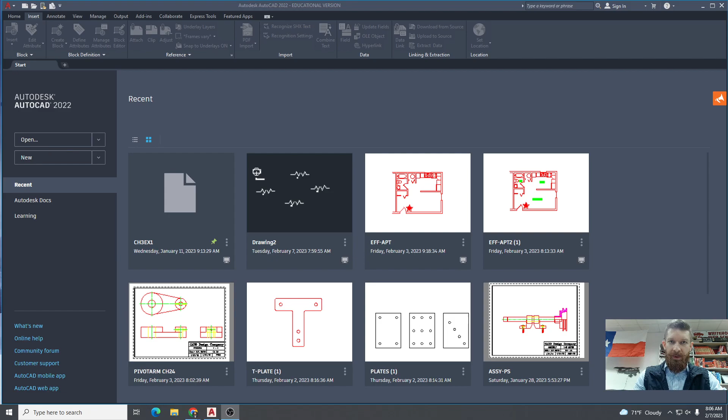So like a doorway or a window or a resistor symbol or something like that, you would use a block command. So you can essentially copy and paste it. You make it into one unit. So here we go. I'm just going to start a new AutoCAD template. I'm going to set my grid to 1 and my snap to 1. And let's just use that resistor example. That's a good one. So let me draw a little resistor here.

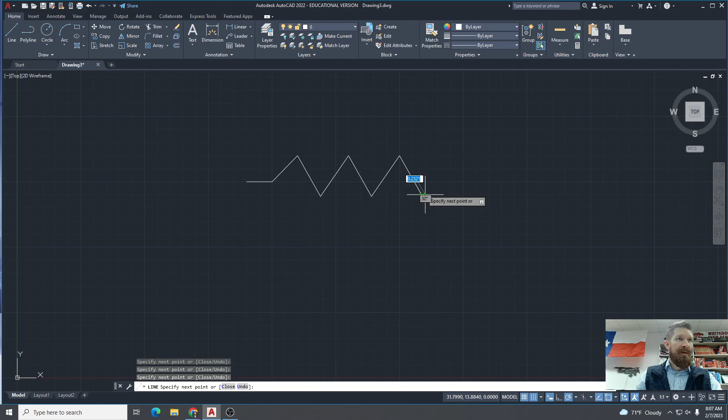For those of you that don't know what a resistor is, this controls the current in an electrical circuit by only allowing a certain amount of current to flow through. Right? It resists the flow of the current. We'll get into that more in engineering year number 2. Right? So here's my poorly drawn resistor.

If I'm going to make a block with an attribute in it, I don't want to make this a block yet. First, I want to create my attribute, and then I'm going to block it all together. So to go over those steps, number 1, create the objects that will comprise the block. So these lines, that represents the resistor. Use the ATTDEF command to create and place the desired text strings associated with the geometry, right?

Number 3, use the block command to convert it. So once we've got the attribute here, we're going to block it all together. And then use insert to insert it as needed. And then the attribute that we create will prompt us to put in a value. So let's use that attribute define command, ATTDEF. And we're going to create a new attribute.

What is an attribute? An attribute is just a line of text. It can be numbers or letters associated with a certain block. Here's my block right here. An attribute can be thought of as a label or a description for the block, but it's a little bit more than a text description. It's live. It gives you the chance to edit it each time you use the block.

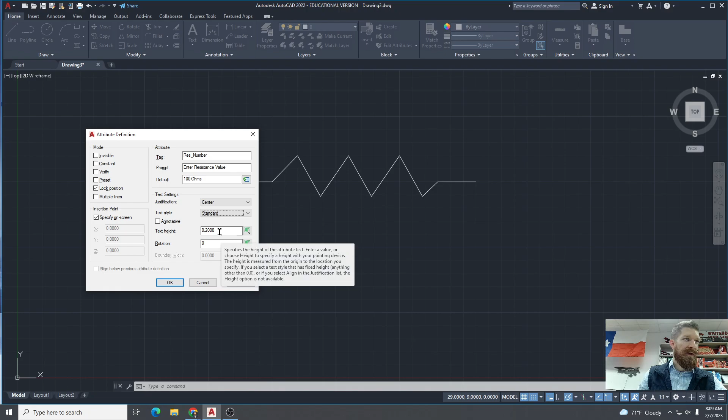So let's put a tag here. We'll say this is resistor number, and then the prompt is going to say enter resistance value. Okay, and then the default value, we'll just make it 100 ohms. Cool. Specify on screen, top left. We'll make justification center. You can do annotative text, so it'll resize when you print it, or you can do standard text. We'll make the text 0.2 inches tall with 0 degrees of rotation.

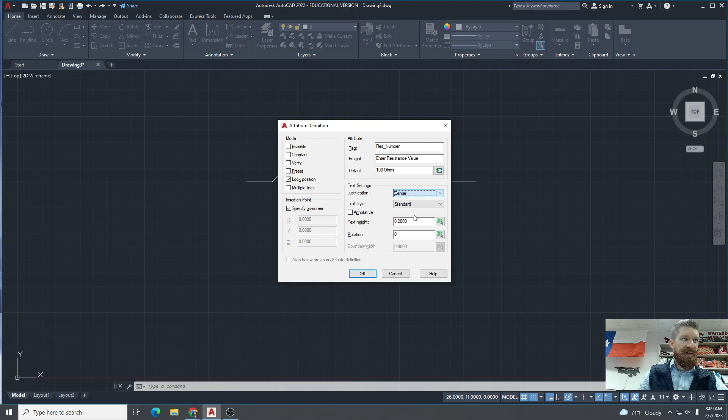And we'll hit OK. And we'll pop that right. Uh-oh. Let me try that one more time. Resistor number. Enter resistance value. We only want one line. Default value is 100 ohms. And justification is center, standard, 0.2 inches. Okay, let's try this one more time. We'll put it right here.

Very good. Okay, so we've got our geometry, which is this. And we've got our attribute, which is this. So what I'm going to do now is I'm going to block this all together. Block. And we'll call this resistor 1. Right? And notice you can change the base point, the object's behavior, the scale, all this kind of stuff you can modify here. I'm going to hit OK.

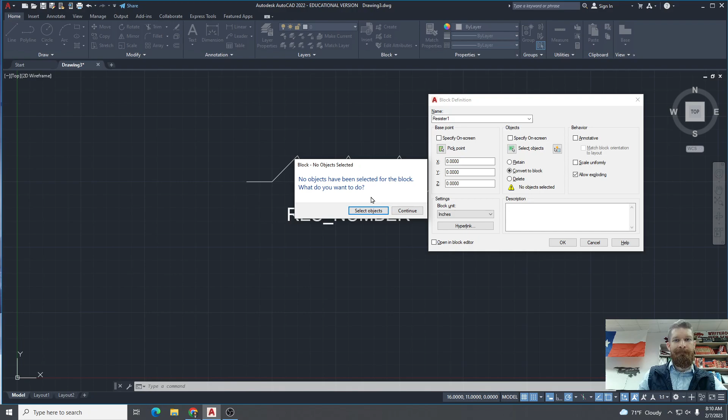It says no objects have been selected for the block. Do you want to select objects? Yes. So here we go. Click. I'm going to use the window select, enter, and I have my block. Perfect. Looks good. 100 ohms.

There's my block. So let's say I'm making a drawing and I need to add in another resistor. Do I have to draw this over again? No, I can insert the block. Well, what if it's a 200 ohm resistor? That's okay. I've created an attribute for my block now. So let me show you how this works.

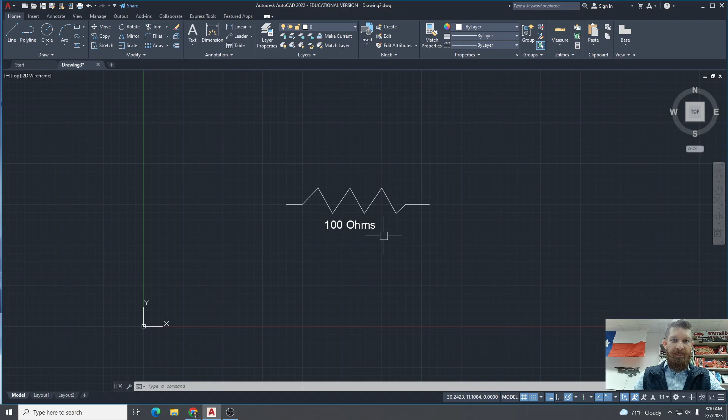I'm going to insert this block, right? And we'll put it right beside the other one. Click. And now it's going to prompt me for the new value. Enter resistance value. Well, let's say this one is 500 ohms. Okay. Automatically updated. Pretty cool, right? You can see where this would be super handy if you're making a complex drawing.

Okay, so that's attribute define. It allows you to define attributes for future combinations with the block. And then in here, I want to make sure we talked about everything. The tag. This tag right here is defined as the descriptor for the type of text that you're going to enter, such as the model number, the part number, the name. On the tag, you cannot... resistor number, prompt enter value, default 100.

A quick note on the tag, you cannot have spaces up here. So if I try to hit OK, it's going to get mad at me. The tag may not contain spaces. So a lot of times we'll just use an underscore in place of a space, right? That is the tag. Okay, the prompt. The prompt is what words or what prompt you want to appear when the block is inserted. So it's like what question is being asked when you insert this thing. Here it's enter the value.

And then the default attribute value, this is the default text that appears when the block is inserted. So if you don't change it, it's just going to stay as 100 or whatever you put here, right? There is an ATTDISP command. Let's get that up here where you can see it. attribute display command, where you can turn it on or off. This is used if you've got like an invisible attribute. So if you're defining and you've got invisible checked, just to kind of speed up your rendering, you can use that ATTDISP to turn that on or off and make it visible or invisible.

There's also verify. So you noticed if I insert this block, right? Insert the block. We'll put it right there. It's going to pop up with a dialog box, a big dialog box to prompt me. So I'll make this one 200 ohms. Okay, good. If I've got attribute dialog turned to 0 and then I insert it, it's no longer going to prompt me with a dialog box. It just gives me this little command line prompt, right? That's the difference. So you want to make sure attribute dialog is set to 1. That way you get that big prompt when you insert your block.

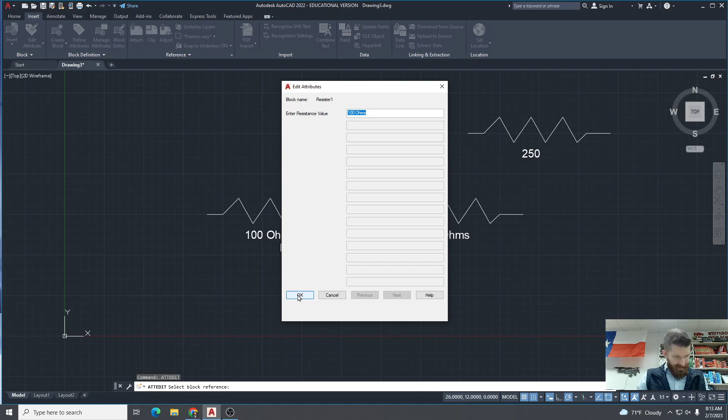Okay, let's see. Lots of tools. As always, it's a good idea to review the book before you take your quiz. There is attribute edit, right? Where you can click it and edit it right there. That's attribute edit. What's really fun about this chapter is some of the commands have really cool names. And one of the cool names is eat edit. Like you're going to eat an edit, which is strange, right? Eat edit. That is where you got this enhanced attribute editor.

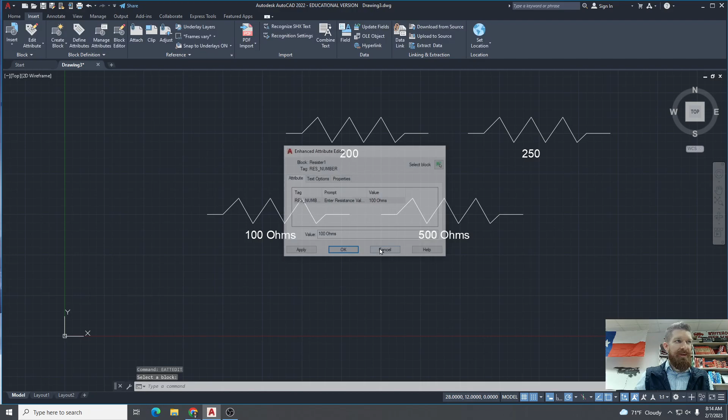So we'll click a block. And I can change a lot of the properties here for the attribute that I put in. I can put the layer, the line weight, the text options, the styles, the justifications. I can turn it backwards and upside down, all kinds of stuff. That is enhanced attribute editor. The command is eat edit. Pretty cool. Okay, moving right along.

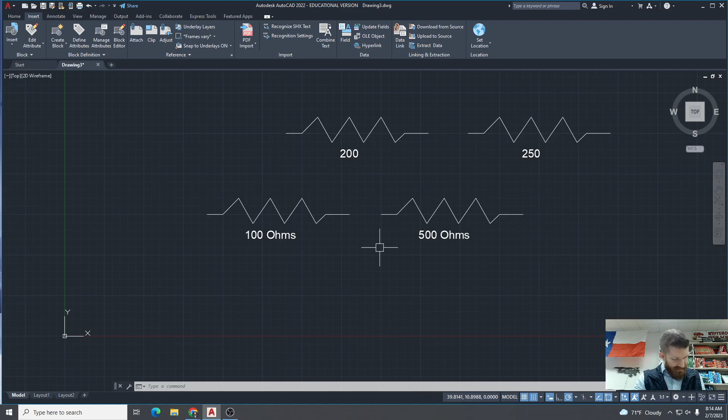There is a find command. So if you think back to chapter 20 or chapter 18 when we were dealing with text, there's a find command where you can find and replace text. There's also a find command here that you can use with your attribute values. So you can find in your attribute values, 250 ohms, and we can replace all those values with 255. Let's see if it works. Yep, there you go. 255. Done. Okay. We talked about attribute editing.

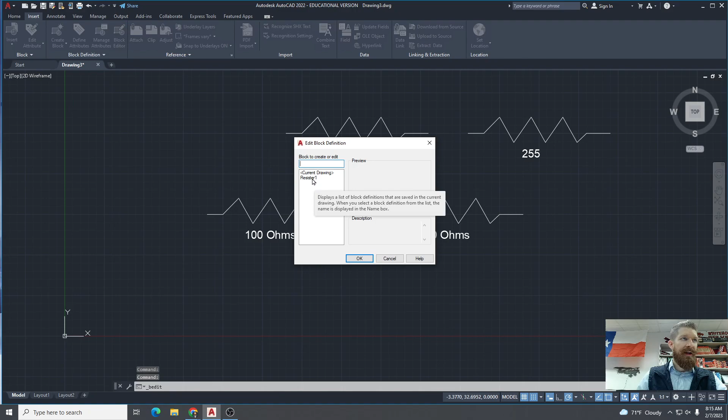Annotative. Okay, this is one of my favorite commands. Let's say we want to edit this block. So we can go up here to the toolbar, right, and we can go into the block editor and find the block that we want to edit and change some stuff around, right? Or you can use this super cool command where you can modify the attribute. And it's called, you'll never forget this one, Batman. BATTMAN, Batman. And this takes you into that block attribute manager.

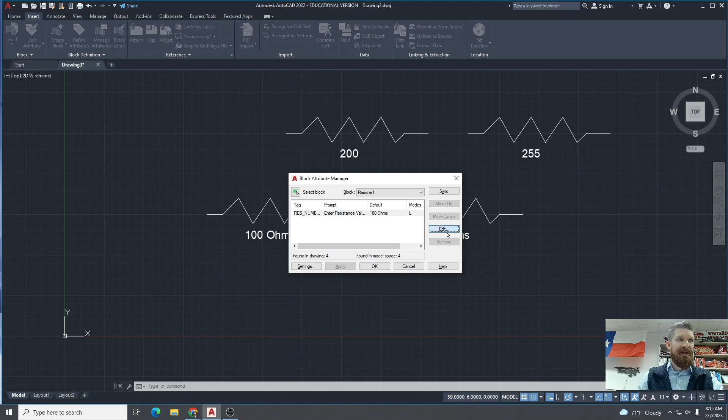So I can take the attribute that I've put with this block. Notice you can change the blocks here. And I can sync the attribute. I can update them all at the same time. I can move them up, move them down. I can edit them. So I'll just edit this. And you'll see this is where we were just a minute ago, right? That is the Batman command.

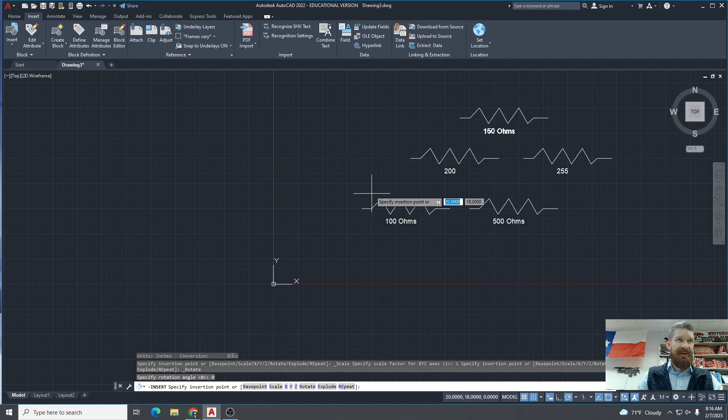So let's say I need to change my default value from 100 to 150. I can go to Batman, go here, edit, change my default value to 150 ohms, hit OK. And then the next time I insert, my default now is 150 ohms, right? So that is Batman.

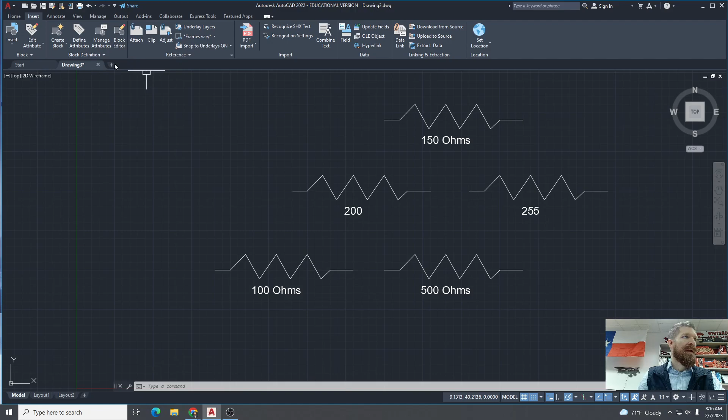Okay, moving right along. How are we doing on time? We're doing good. Okay, I think I mentioned it just a few moments ago, but there is attribute sync, where you can update. So let's say I change something on one of these blocks. Let me go to the block editor, right? We'll take this, and let's say I change this, so

we'll take this point and move it down here, and we'll take this point and move it down here, right? And I'm going to save that. If you've got sync turned on, it automatically updates all of your blocks with the change that you made. If it does not, you can go to attribute sync and select one of your blocks by name. I don't know, resistor 1, right? And you can sync all of your attributes just the same way you did your block.

Okay, moving on to extracting attributes. So there's this awesome program called Microsoft Excel. We have kind of touched on it in class, where you can store data, right? It's just a workbook. You can store values, all kinds of stuff. Well, AutoCAD has a link between Excel and AutoCAD drawings, and we're going to explore that. It's super handy for several different things.

The table can be used as a report listing a variety of data, such as the name, number, location, layer, and scale factor of the blocks. Attribute information such as prices, manufacturers, sizes, dates, other attribute data. And then this is what I use it for in the real world. AutoCAD drawings contain the intelligence to calculate bill of materials. So bills of material just list the parts that you're using in your drawing. They can contain supplier information, employee records, quotes, billing totals, maintenance schedules, catalogs, everything else.

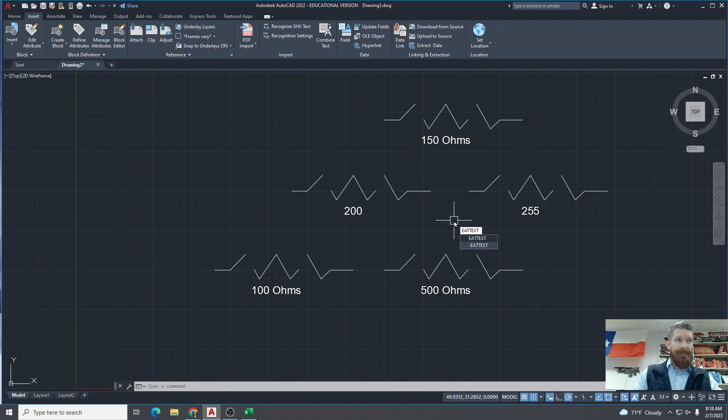So I don't know if you've ever put together IKEA furniture, but at the beginning of the instructions they have that list of how many bolts you're supposed to have and how many washers and everything else. That's put together using this kind of data extraction tool where it goes to a table. So let's see what that looks like. The command we're going to use is another fun one, EATTEXT, which is data extraction, right? This opens the data extraction wizard.

Let's save this. We'll call it resistors. Save, right? And it's going to take you step by step through the process of extracting all the data in this drawing, right? The data extraction wizard leads you through the 8 steps to extract block attribute data, offers a number of features that are not available by any other means. You can extract data from current drawings or from multiple drawings and sheets. You can extract attribute data from nested blocks and X references. You can view and edit the organization of the data and create the table.

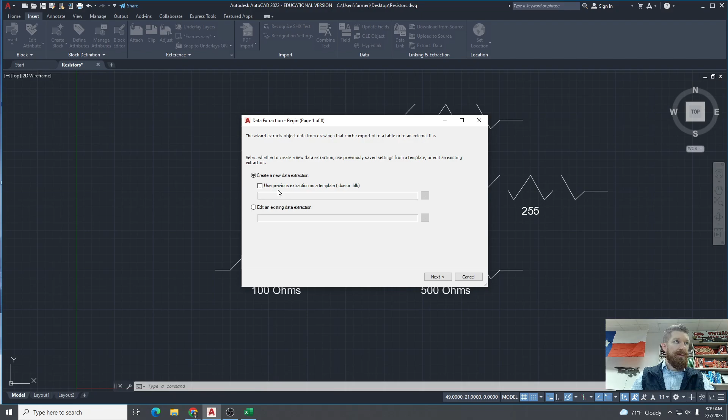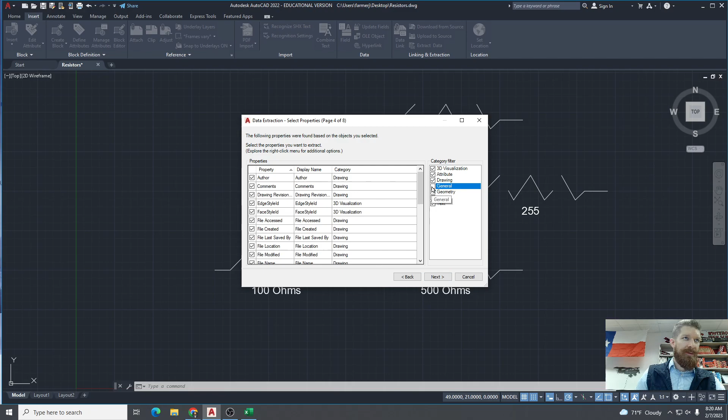So let's just go through here. Yep. Next. And this table is going to be gigantic. We'll say sample. Save. Next. And let's say looks good. Let's just say I want geometry and attributes and text. Yep, looks good. And you can actually insert this table into your drawing as well as put it on a spreadsheet. You can manually configure the table. We'll just leave it as standard for right now. Finish. And let's see what this looks like.

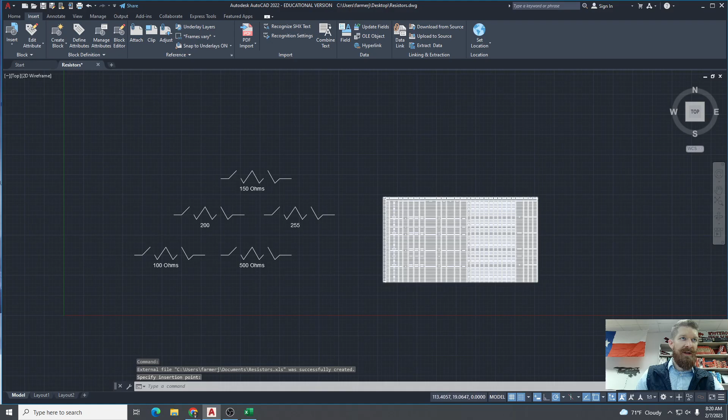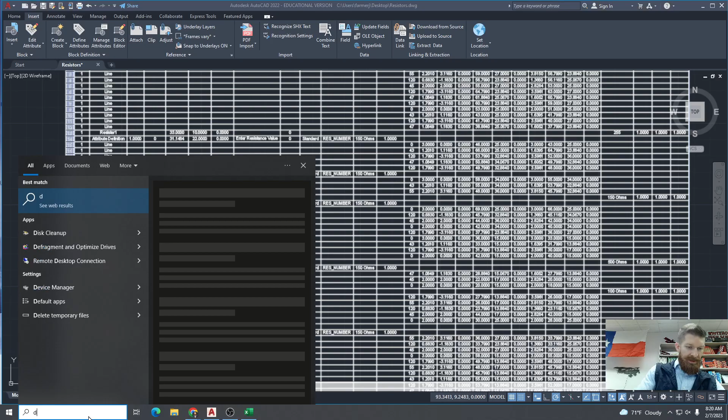I'll put it right over here. Ta-da. All kinds of information. So you can see right here, it's got the resistors and their values, their default values. It's got the actual resistor numbers here. I don't know if you can see that. This has all of the information on the lines that we drew. This is overkill really, but it's got all the information about your drawing. It's all right here. And then, if you go to Documents, oh dear, let's try this.

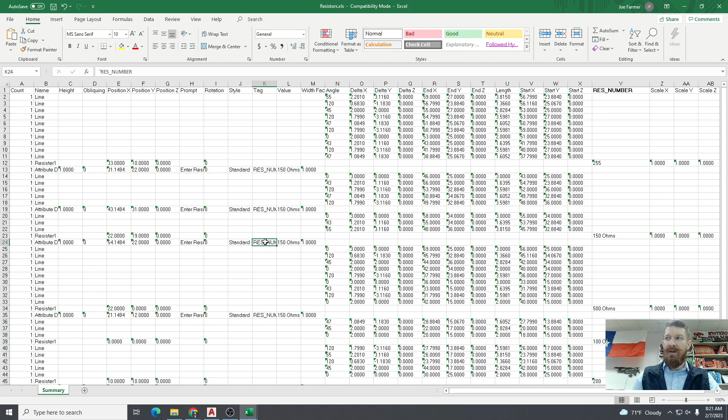Documents, check it out. There is a table in Excel with all of this information, right? So here is your resistor number right here. See that? And then there's the resistors we put in. It's got the quantities, it's got the values of the lines that make up the blocks, it's got the names, pretty much everything about your drawing you can edit and send to a table. So super duper handy. That is the data attribute extraction, the EATTEXT tool.

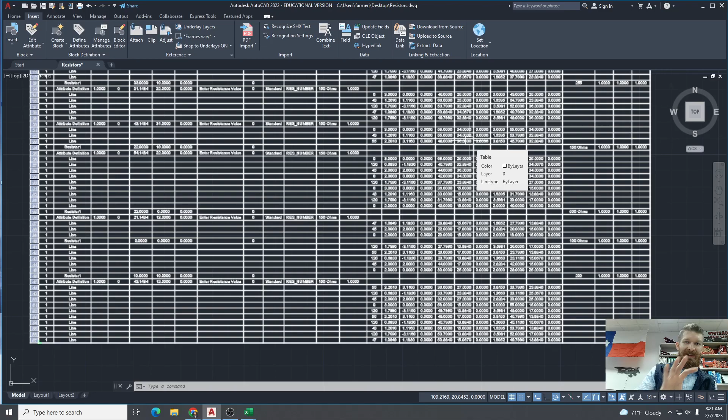And then the last part of this is the information can flow both ways. So let's say I have a table in Microsoft Excel. I can actually take that data and move it into AutoCAD. So I can move it from AutoCAD to Excel, or I can move it from Excel into AutoCAD. And the tool for that is called Data Link. The Data Link command produces the Data Link Manager. This tool is used primarily to create a link between the current drawing and an external Excel file. The manager does not create tables or update data between the drawing and the external file. It just transfers it, right?

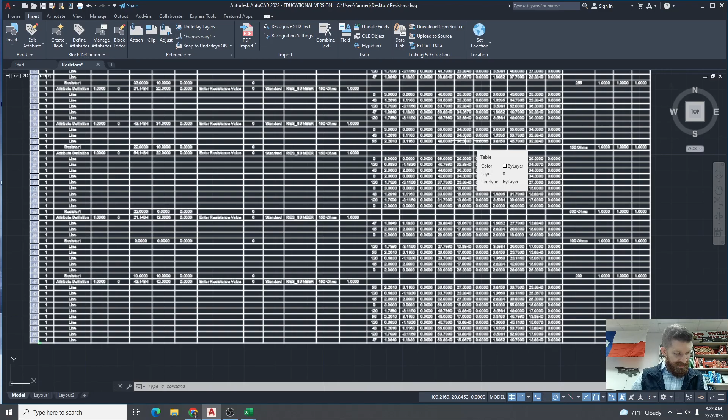So I can go to Data Link, and it's kind of like that wizard that we used earlier. It'll take you through the process. I don't have time in this video to cover it, but just know that that's an option. So this is all about block attributes, not to be confused with text. These are live attributes. This is chapter 22.